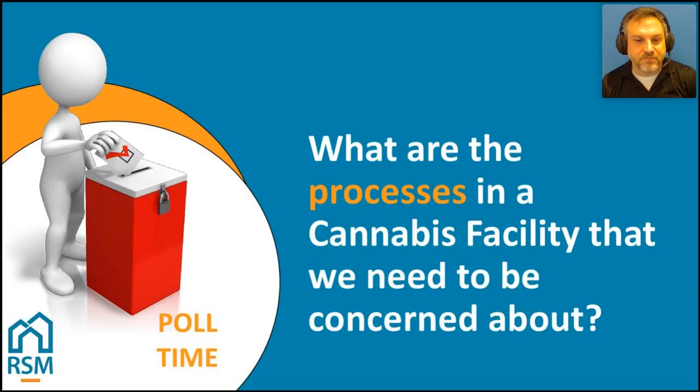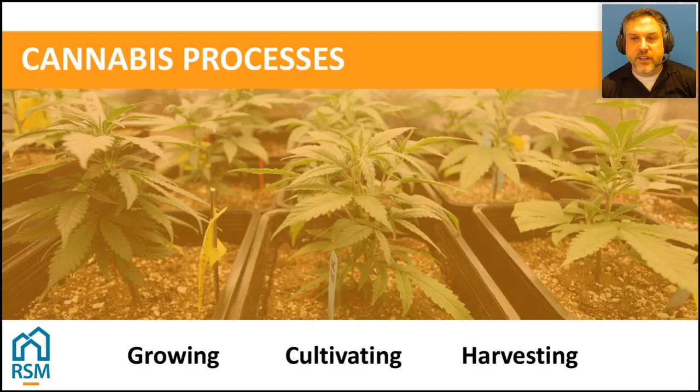Well, let's talk about what we think are some issues you need to be concerned about when dealing with cannabis processes. Of course, when dealing with cannabis processes, they're going to be growing the cannabis plant itself, cultivating the plant. So once they're finished growing, they cultivate, and then of course harvesting. Like we looked at in that last poll, there's going to be some combustible content in this particular area of the building, so that might be something we're concerned about. The growing, cultivating, and harvesting is definitely something we have in those buildings.

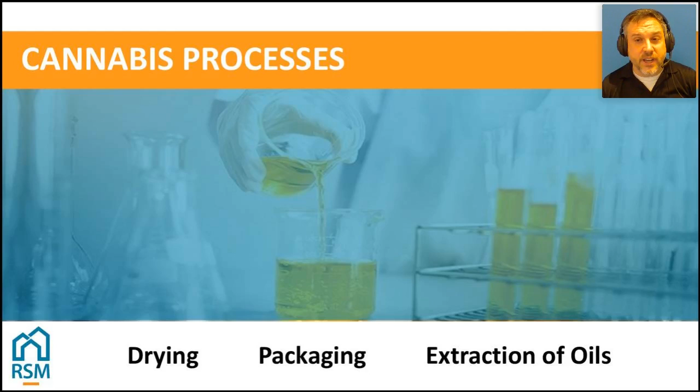When we're dealing with the drying of the material, that could be something we could be concerned about. Of course their packaging, and then we're also going to be talking about the extraction of the cannabis oils itself. And I think as we start going up through this, you're going to realize that really the biggest issue we need to worry about is the extraction of the oils. It's the process of how those oils are extracted that can become the issue we need to be concerned about with regards to cannabis facilities.

So what I want to do right now is bring up a short little YouTube video I found. It's only 3 minutes, and really I like it because it talks about and shows one of the extraction methods there are with regards to cannabis, to help you understand why the extraction of the oils can be an issue. So we'll cue that video up for you right now, and we'll bring that up.

All right, well, I'm glad everybody could get an idea with regards to that video. I liked it because it was a short snippet and it talked about how they get these oils out of the plants, and I think that's the hazard.

As you heard, they were using ethanol. Not all of them use ethanol, but most that I've seen do. There are other processes too. On the slide, you can see the use of ethanol - the idea is you take a solvent and bathe the plant material in it, and that separates out all the materials, the different compounds they use to make these medicines or recreational oils.

So ethanol is one way to do that. Then the question becomes, how do I get the residual ethanol out of the actual material? There's a lot of ways they do that. With ethanol, they have to use an extreme low freezing point, so in these facilities you'll see some very high-tech freezers that bring the temperatures down to help with that solvent. We also have a lot of sieves and distillation to take out that ethanol, because you don't want that in the final product.

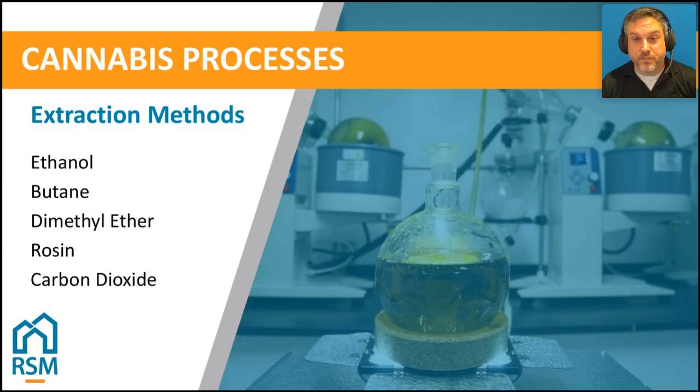It looks like, as the poll's going on, we'll publish the results at the end, but it looks like we have a split between industrial building and it depends - about 50-50, with a few others not sure, and a small number saying straight it's a farm building. That gives us an idea of what we're seeing out there, that there's a bit of confusion. I know when we first started dealing with these issues, that's what happened - we were scratching our heads over which way to look at this particular facility.

So first, I want to talk about farm buildings. The Farm Building Code is an old document - it hasn't been updated since 1995. There's been a lot of work done to update that document, but it's old and very thin, so there aren't as many requirements in the farm code. It does make a difference whether you're in a farm or being treated through industrial.

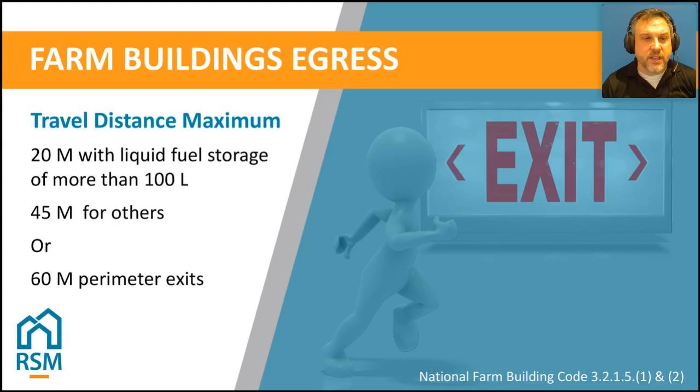Definitely something to consider with regards to the extraction. So when you hear that word extraction, you see a room on a floor plan as a plans examiner and you're doing a farm building and they say it's cannabis, I think the red flag you want is their extraction, and this might appeal to that. Of course, there's the 45 meter travel distance in the buildings, and 60 meter perimeter exits are permitted in the Farm Building Code.

So the extractions, that is what we are really focused on. And when we're looking at these particular slides and extraction methods, that's where we really want to focus. So when you give your first deficiency letter back, you want to say, okay, you've indicated a room called extraction room, or another term I see is winterization room, because a lot of times they're freezing. Remember, we talked about the freezing process. So when you see those terms, I think you want to ask the question, for any cannabis facility, is there going to be some extraction of the cannabis oils on site?

And when that happens, the building code in the farm code area says if you're a farm building, normally you go straight to the National Farm Building Code. But just in January, the Ontario Building Code was updated to add some provisions to specifically deal with Farm Building Code. A lot of times I was dealing with it through the fire code directly for the use, but now the building code has been updated to give us tools to basically throw them into the Ontario Fire Code requirements for these flammable and combustible liquids being used. So it's that ethanol, used to get out those particular important materials. That is what we're concerned about. So in the building code, it sends us right to the Ontario Fire Code.

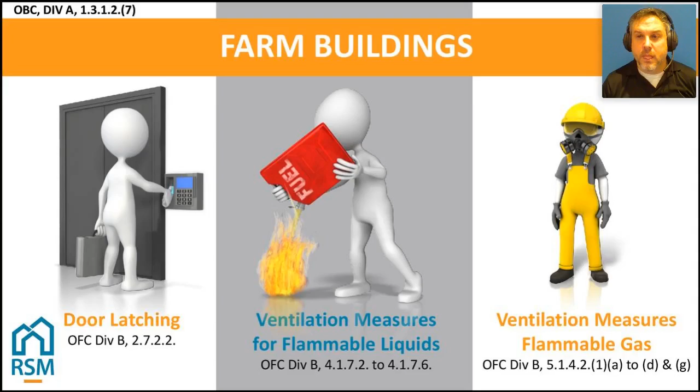So door latching, we talked about that already. It really brings the same requirements that are in the building code - it has to be readily opened from the inside, a single operation, no keys and no special knowledge. So set those alarms off for the test day. It's not to say you're taking any of that valuable material, but we need to ensure there is no egress, no stopping of the egress of that room.

When we're dealing with farm buildings, the 2 other issues it sent us through are ventilation measures for flammable liquids and ventilation measures for flammable gas. So what we should see in these rooms are sensors, LEL sensors - lower explosive limit sensors - and there are very specific provisions that the fire code asks us to do. This is a generalization of it. I know if we get into more questions, we might look at getting further into it, but really flammable liquids and combustible liquids in Part 4 of the Ontario Fire Code is a big, very complicated section.

So definitely, when you are getting into these issues, you really need to have an expert on the consultant team. You need to be saying to the designer, I need a report, or I need somebody on your team who can go through these specific measures and ensure that Part 4 or Part 5 of the Ontario Fire Code has been met.

We want to see interlocks to stop the generating equipment. There has to be alarms that go off when the LEL is exceeded. There's an NFPA 91 hood system in this building, with specified locations of low inlets and low and high outlets. So there's a real issue with your mechanical engineer there - if you're a mechanical engineer, you may be able to go through these provisions, or you may need some type of fire protection engineer. I've seen a few of them out there now that are really focusing on this stuff.

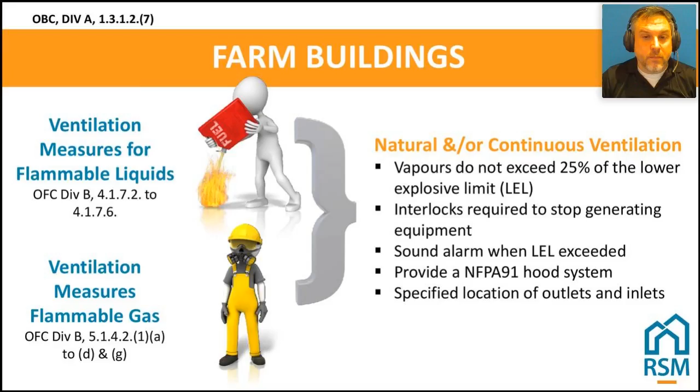And something to note, Gerald - it's something that seems to be readily available. I haven't had a problem on any of the permits when I ask for that. It's not always provided right up front, but as soon as I ask for the report, they can provide it to me.

So I think they're doing it anyway, and the reports I've read are very good in terms of spelling out the processes, what's involved, and what's required. Just taking a good read through those reports usually justifies what's going on in that building.

Yeah, no, that's good, to go through the steps. And I think when you get that report in, you want to open up your Ontario Fire Code and follow up to ensure you're following how the engineer is going through those items, and just double check that they've covered them off. But getting that expertise on the team is definitely essential.

We got a question here. Are these requirements just for the extraction areas? Yes, essentially the extraction areas.

Now, this is what we're going to talk about on this poll here: do we need to be concerned about other issues with regards to cannabis? I think really it's that extraction area that's the number one issue we need to look at. We're going to still keep talking about some of these processes as we get into the industrial section because they're really applicable to both, but yes, essentially it's that extraction that's the number one issue you want to look at.

We got a few more questions here from Andy. We're going to go back a little bit. Andy's specifically talking about these hoop houses - we have seen these greenhouse type structures, and that's what he's referring to. He's asking, would this be considered a building?

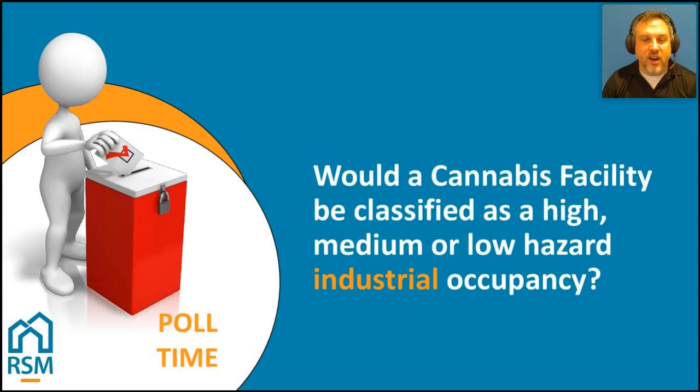So to have a bit of a discussion on that particular poll, let's talk about it. I think this might be a refresher to quite a few of you, but it's definitely a good discussion point.

When we're dealing with industrial buildings, we have three different types depending on the type of hazard. When dealing between an F2 building and an F3, there's that special number the code gives us within the definitions that talks about 50 kilograms per meter square of combustible content. So if we're over 50 kilograms per meter square, we're an F2. If we're less than, we're F3.

We also have to remember it's not just about how much combustible material is in the building, it's about how combustible that material is. So we also have to look at the energy output. 1,200 megajoules per meter square is the other factor we have to look at. You may have less than 50 kilogram per meter square of combustible material, but if you're over 1,200 megajoules for the combustibility, you are in F2. So you have to check both.

Many times when I look at reports, I see that they've only dealt with the combustible content, and I have to say, listen, you've also got to look at the combustibility too. I need to see that both of those factors are less than, or not more than, in order to keep it in F3. My typical stance has been, if you want to be an F3, other than maybe a concrete plant or something, I want to see calculations, because we need to be able to see that you are either above or below.

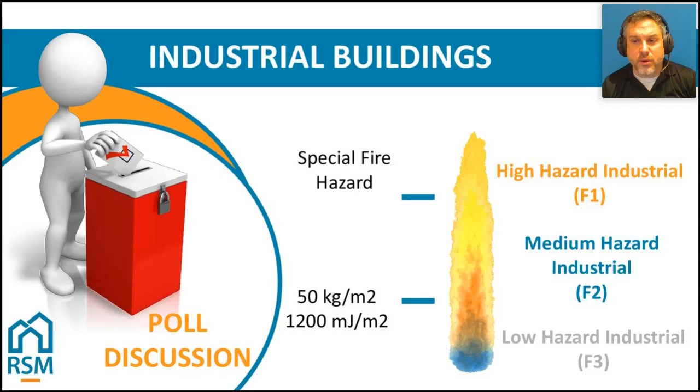So when we're moving on to industrial buildings, someone asked if we have a checklist. Well, I have a roadmap. Is a roadmap good enough? Let's go through this and see if that helps a little bit. What I've done on this chart is talk about where we go and where we're referenced, with regards to a Part 9 small building or a large Part 3 building.

In this particular section, you can see there are a couple of areas we're being sent to when dealing with cannabis facilities. Really, it's the flammable liquids, right? CO2 extraction wouldn't apply because we don't have any specific issues with flammable liquids. But when dealing with ethanol, which is the most popular that I see, here are the issues you'll be dealing with. A lot of them will send you to the same parts, depending if you're Part 9 or Part 3.

So in large Part 3 buildings, two code changes ago, they added a new section, 336, which is design of hazardous areas. That is an important section. Whether you're dealing with Part 9 or Part 3, you are being sent to 336. That section is specific to flammable combustible liquids, flammable compressed gases or any type of compressed gas, dangerous goods, asbestos, or fertilizers is what I'm getting at there. So those sections are pointed out through Part 9 and Part 3: hazardous dusts, gases, and liquids.

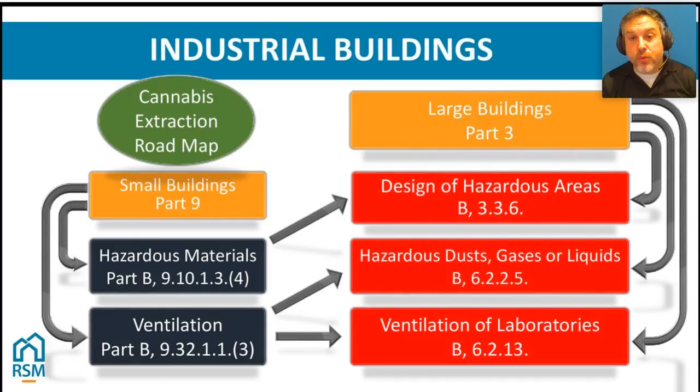So as I go through, I've created some slides that drill down a little bit on these particular requirements. When we deal with 336 in the building code, it sends us to two different areas: flammable and combustible liquids, and flammable compressed gases. And they take you to the Ontario Fire Code, which is another section we can talk about later—what do we need to look for in there? Essentially you're talking about what types of ventilation, which is also talked about in Part 6 of the code, and it sends you to the fire code. We've got storage restrictions as well.

When dealing with flammable combustible liquids, we have incidental use, and sometimes a more primary use. This would typically be incidental, but there's going to be very specific milestones on how much liquid is being installed and what type. Can we use cabinets? You've probably seen those ULC cabinets—if you have up to a certain amount, you can put them in the cabinets. It depends sometimes on if it's an open or closed container, and sometimes it's just storage, sometimes it's storage and dispensing. All of these factors are brought into account through the Ontario Fire Code.

So there is a lot of issues, and that's why it's good to have somebody with a lot of experience in Part 4 when you get a design professional, a mechanical engineer or someone to provide it, because they need to be able to tell you how much material, what type of material, and what type of storage. When we get into cabinet storage, if you go over that amount, you may have to go into a storage room, and those rooms might have to have fire separations, and maybe explosion venting for that particular room.

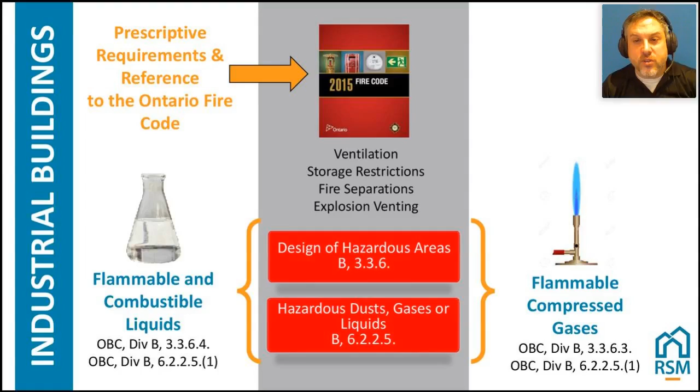Laboratories, 6.2.13 in Part 6 of the code, deals with these rooms being used as laboratories. Now, the problem is that it's not a defined term. So I have gotten a little bit of pushback in the past of, why are you saying this is a laboratory? Well, I think if we look at the common definition of a laboratory, in my opinion, it meets it. Maybe some people here might think otherwise, but that's something we have. So you might get some pushback when you ask for a laboratory. In my opinion, I think it meets the definition of a laboratory. So I've been asking for these provisions.

Generally speaking, there's a few more prescriptive requirements, but it does send you to Part 4 of the fire code too, for the use of those flammable combustible liquids. When you looked at it in the video, you can see that they're essentially mixing the plants with this hazardous material, this flammable liquid. So it needs to be dealt with through ventilation, enclosure construction. A power ventilated enclosure is another way they look at this room, because this room itself is power ventilated. We don't want any situation where that vapor can become large enough in the room to cause an explosion hazard. That's the idea of these particular provisions.

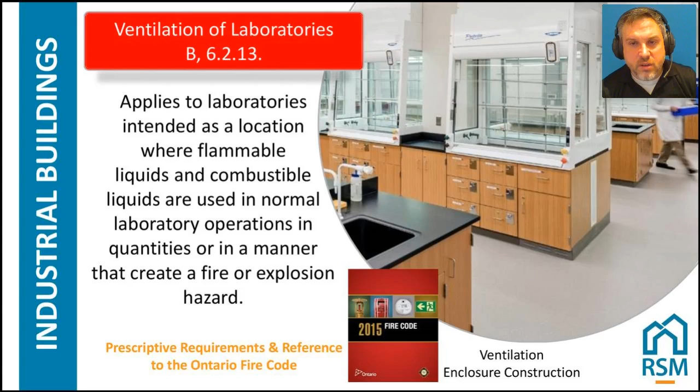So when we're dealing with these issues with regards to ventilation of laboratories and other areas, you can do continuous mechanical ventilation, natural, or some combination through the design parameters. If you're dealing with just the growing itself and the dusts that come off of that, it's not really something specific through the building code itself, but I have seen a lot of manufacturers providing that because of the cannabis regulations and the Ontario Health and Safety Act. So due to those things, we're going to have particular ventilation. Now, there are provisions in Part 6 that say you have to provide ventilation in accordance with ASHRAE standards, so that might play into ensuring proper ventilation for the use that's in that building.

Another question here is, can the growing area be considered a controlled atmosphere due to CO2 requirements for the plants? If you're dealing with carbon dioxide provisions and using the solvent with carbon dioxide, it's a high pressure area. There are issues related to health and safety, but nothing specific in the building code other than through the Health and Safety Act with regards to asphyxiation—if the stuff is discharged into the room, it can cause an issue of people essentially drowning in CO2.

So if we look at the issue with regards to industrial buildings on egress, just to bring this together and match it up with what we were dealing with in farm buildings—of course, an unsprinklered building we'd be dealing with 30 meters, whereas 45 meters in a farm building. So travel distances are definitely a little different. Of course, we have 60-meter perimeter exits, same as in the farm code, so you can do the 60-meter perimeter. But for an F1 high hazard occupancy in these extraction rooms, we'd be looking at 25 meters. So there are definitely a few things that make this an interesting difference between a farm building and an industrial building itself.

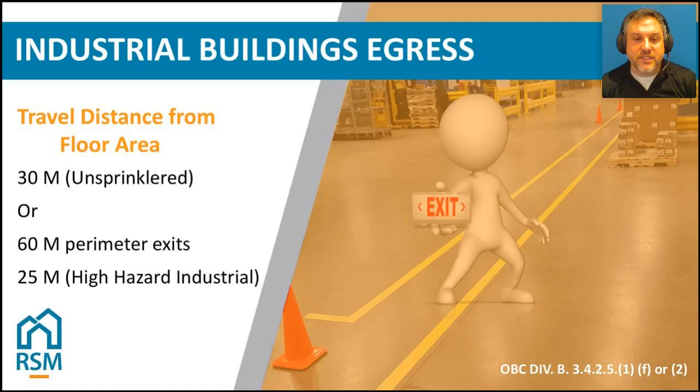So to give a recap, we talked a lot about cannabis processes and the compliance path. If anybody has more questions, keep entering them and we'll see what we can do as we tackle these particular issues. So when you get one that comes across your desk, you'll have a bit of help remembering what we talked about. Let's ask that question—as building officials and designers designing these buildings, we have to definitely ask some questions, because that's what we do. We ask questions because a lot of times they're not putting that stuff right out in our face. We've got to ask questions to get that information.

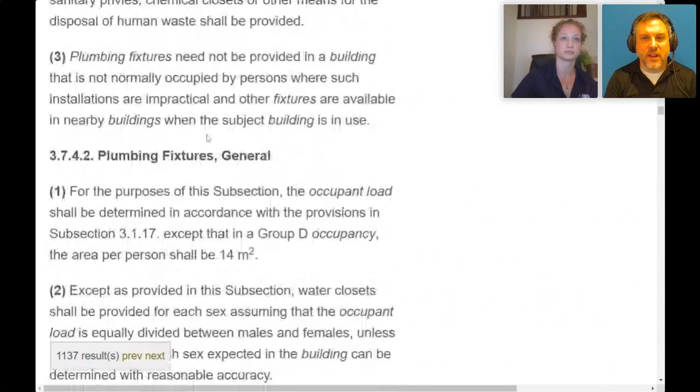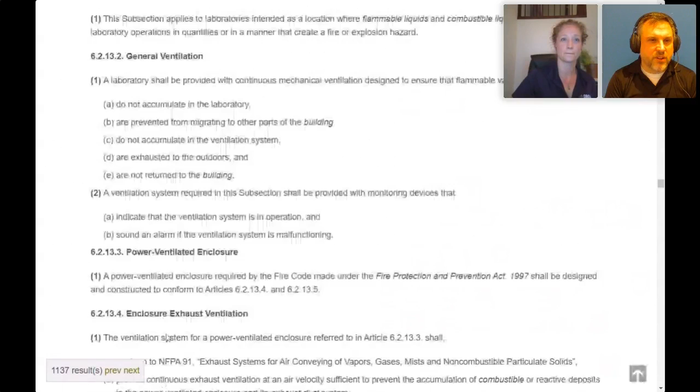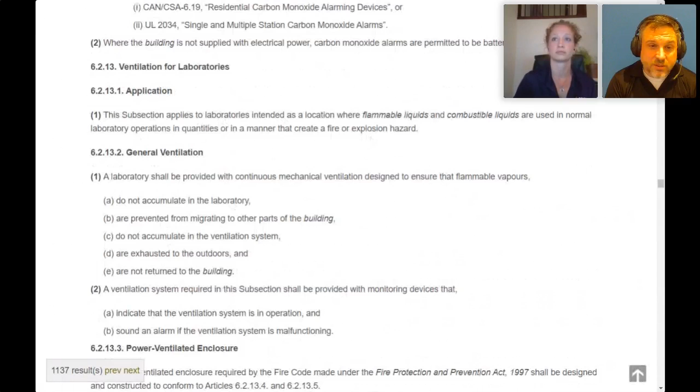As you're going up there, my gut feeling is the reason they have ventilation of laboratories is most of the requirements are always talking about flammable combustible liquids. I'd have to look through that particular section of the code to see if it's not just about flammable combustible liquids, but my gut says this subsection applies where flammable and combustible liquids are used. So definitely, it's got to have flammable and combustible liquids used in a manner that would create a fire explosion hazard. So for cannabis facilities, if they're using ethanol, butane, propane, then I would see that they fit into, like I said in the presentation, laboratories for sure under the requirements of 6.2.13.

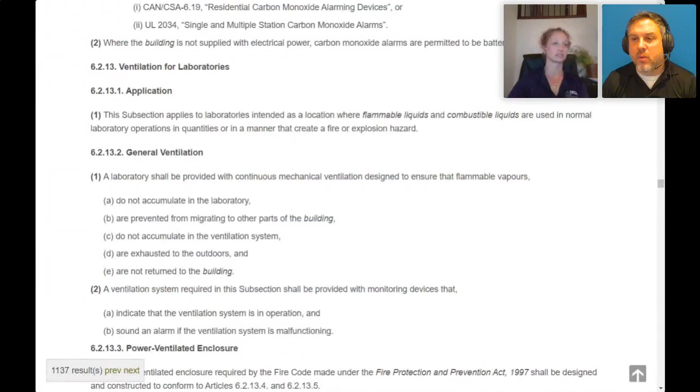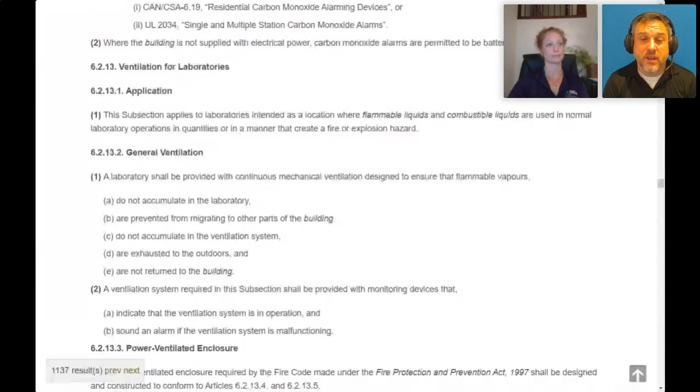Does RSM do fire code review? Most of our work is always done through municipalities. At this point, we support municipalities. We don't do any private sector work with regards to architects or engineers. It's more our business model of supporting municipalities, but there are lots of great fire code and building code consultants out there. I've seen lots of reports from them, so definitely reach out, do a Google search, they can help you. But with regards to municipalities, if you want us to review the entire plan for a cannabis facility, or just the cannabis section, yes, that is what we do. We support municipalities with their plan review services, so please reach out.

Another question: in rural areas, what are you seeing for fire protection? For hydrants and water source, in rural areas, if it's zoned farm and it's a farm building, there is no requirement for on-site water. But if it's a Part 3 building, then yes, it needs to meet the provisions requiring on-site water supply through the appendix. I've gotten into situations where they've said the combustible content is very low, because there's an exception in the appendix for on-site water where it's an extremely low combustible content, so on-site water isn't needed.

Good point, but I think that's an appendix, so it's not the actual code. If you were wanting to consider no on-site water, you'd talk to your fire department. I don't know if you'd want to do that with the special fire hazard in the extraction area. Honestly, on the past couple projects I've done, as soon as I asked if they do extraction, and they say yes, and I ask if they realize the implications with regards to explosion protection and combustible liquid protection, they usually back off and don't include it because it's extremely expensive to add these provisions. So when you know someone's coming in with a cannabis facility, ask the question right up front so it isn't a surprise later.